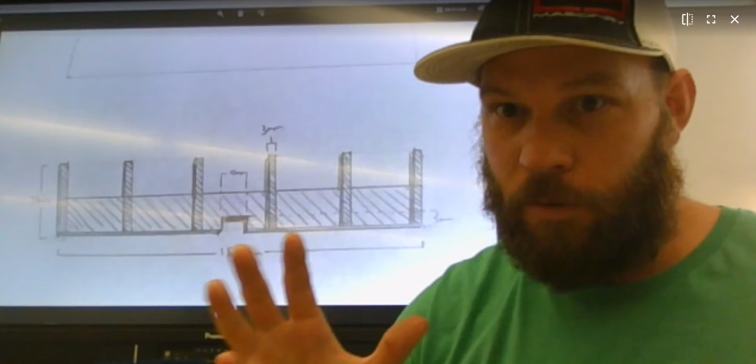Okay, so getting ready to duplicate, there's a couple things you have to think about. I always mess it up first and then have to go back and figure it out. So this is what you have to think about. Even though we want to have six of them total, when we duplicate, we only need to make five. So we have to think about how much space will there be for five more? How far apart will they be?

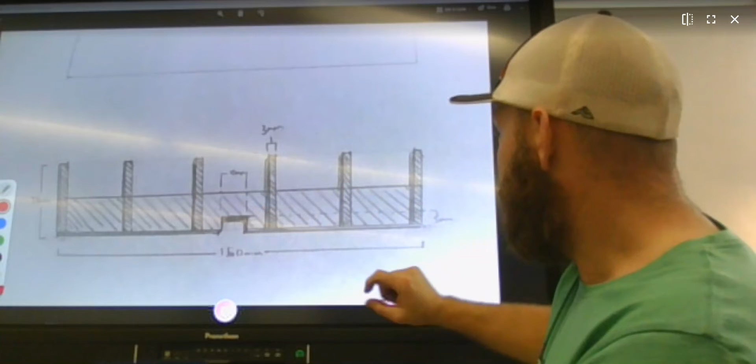So the total distance here is 150 millimeters. So over here, 150 millimeters. So I need 150. But we don't want the edge hanging off. So we actually need to subtract the width of this last one from the total distance. So I'm going to take 150 minus, and these each are 3 millimeters wide, 3. And that equals 147.

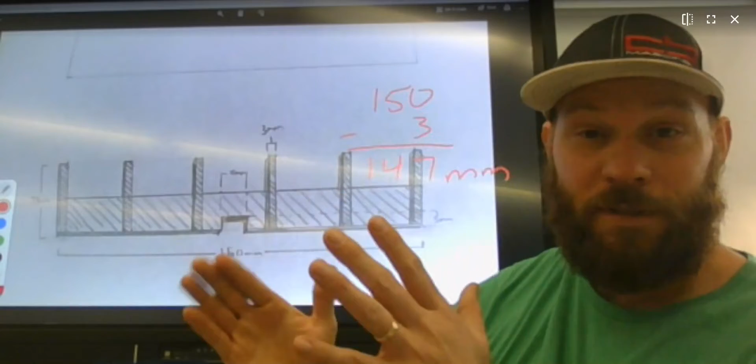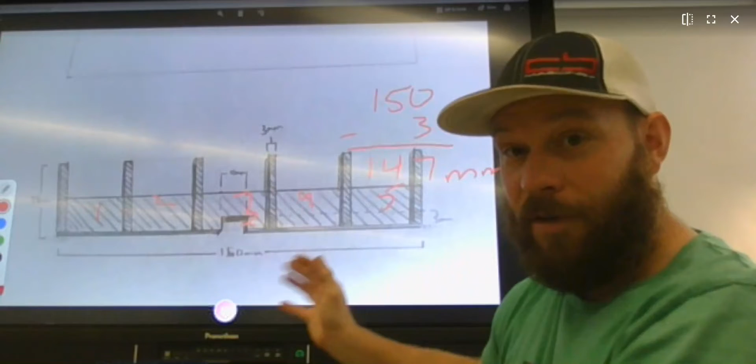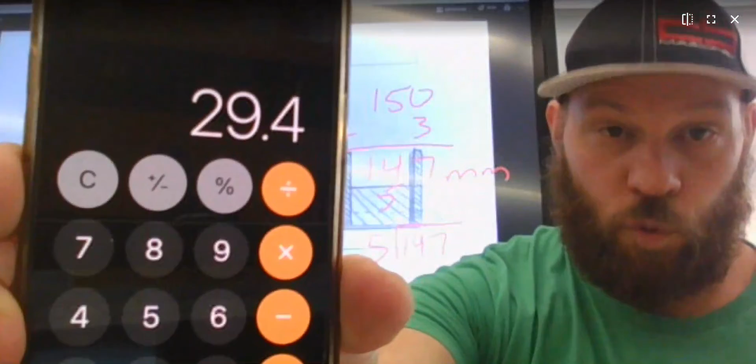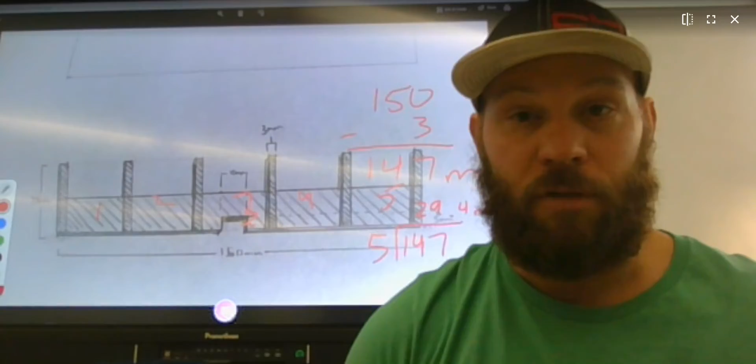I'm trying to find out the total distance that I need to cut into these five spaces. 1, 2, 3, 4, and 5. That's supposed to be a 3. Okay. So now I take 147 and divide that by 5. 5 spaces. 147 divided by 5. I could figure it out, or I could go to my calculator and find out that it's 29.4 millimeters. 29 and 4/10 millimeters. So now that I have this information, I can go into TinkerCAD and duplicate them exactly how far I want. So let's do that.

All right, so now I'm in TinkerCAD again, and I'm going to select my original stick thing, and I'm going to press Control D on my keyboard, or one of these buttons is duplicate. It's called duplicate and repeat, which is actually the thing we're going to do. So duplicate, Control D, that actually places the exact copy in the exact same spot as the original one. So I need to grab onto it and pull it away.

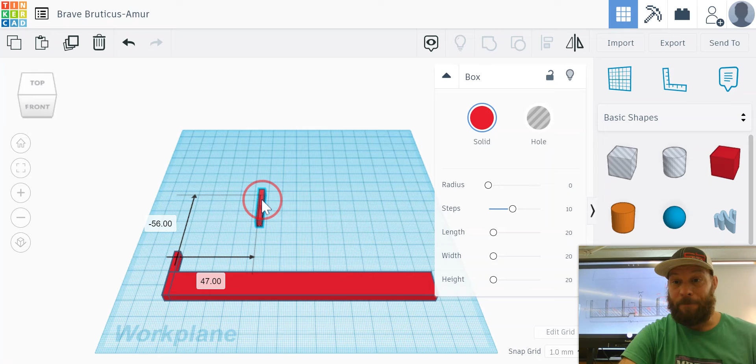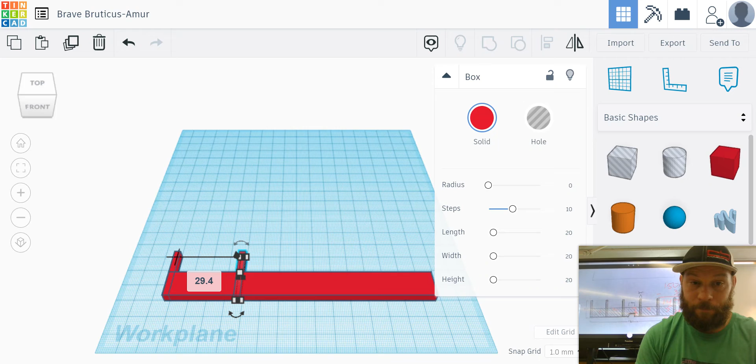Now, if you grab onto it, it's going to go wherever. If you hold the Shift key, it will snap it into the plane that it's on. And I want this distance to be 29 and 4/10. So I'm going to let go and click 29.4. Enter, and that puts it exactly where I want it.

Now I just need to press Control D again until all of my copies are in. This brings it right up to the edge of my 150 millimeter main piece. Hopefully you get how to do that math. You have to subtract the width and then divide by how many spaces you want.

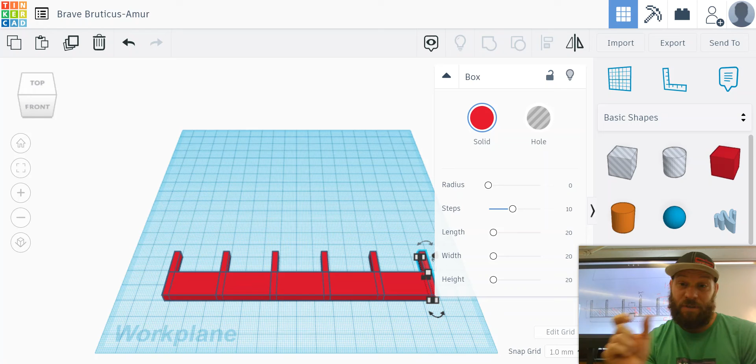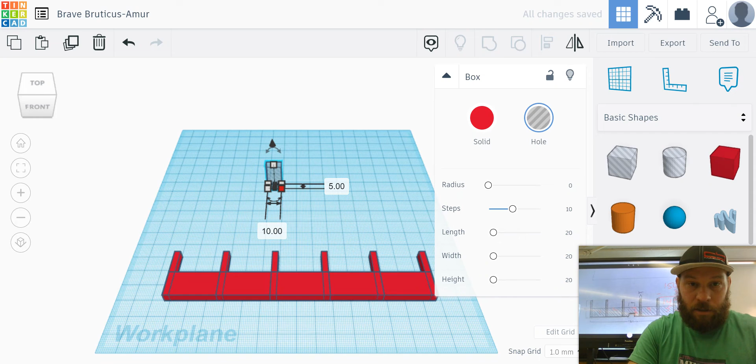Okay, so that's done. Now I just need to have this little hole right here, which should be not a problem. I'm going to use the hole tool, or the box, and I'm just going to make it the size that I want it. So it's going to be 10 millimeters wide and 5 millimeters deep. The height doesn't actually matter as long as it's greater than the total height.

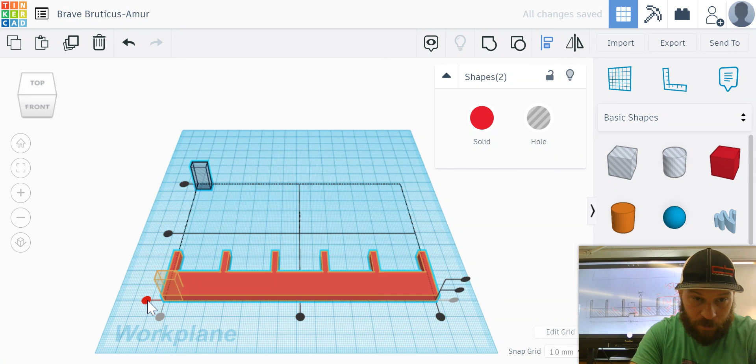Now I'm going to use the align tool again, but first I'm going to select all of these red ones and group them together so that none of those sticks move anymore. Now I'm going to select both pieces and align them so that the box is at this edge and the center. Now it's exactly where I want it. My final step is to group those two together, and that makes my cutout.

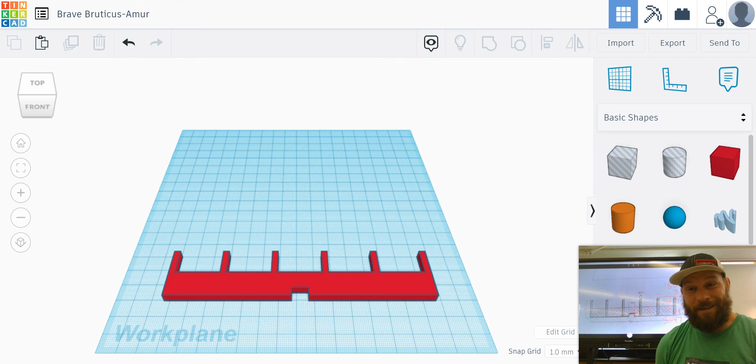There it is, one piece complete. The exact size I drew it is now in TinkerCAD, and it's the exact size that the 3D printer will make it. It's actually the same size as I drew on my paper.